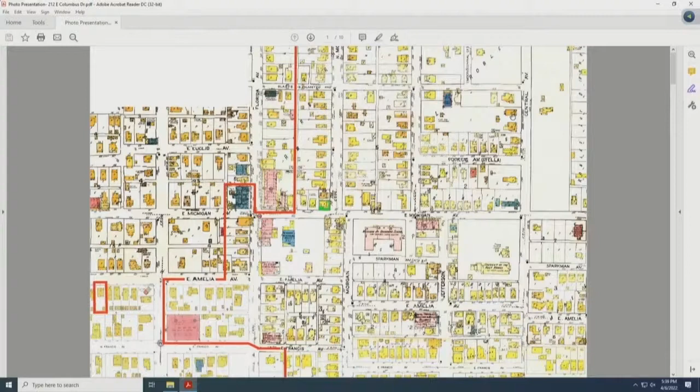You should see in front of you the 1920s Sanborn map with the subject property at the center of the slide, shown in green, at the corner of what was then Michigan Avenue, now Columbus Drive, and North Morgan Street. This property at that time did have a residence on it. You can see here that it's roughly at the center of the Tampa Heights Historic District, about halfway between the north and south ends. The property, again shown in green, at the corner of Columbus Drive and North Morgan Street. It's currently vacant.

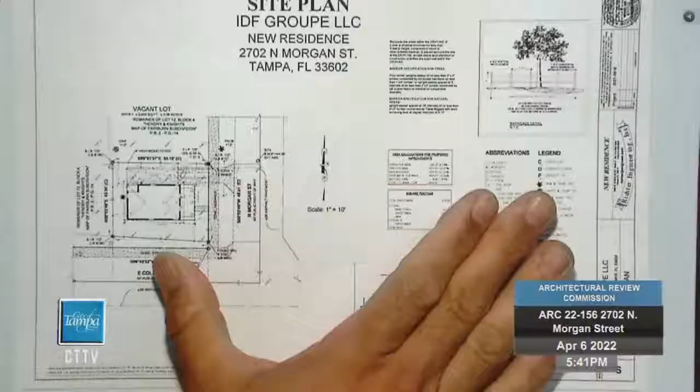Based on the staff report, which I received last Thursday, I was able to make all of the revisions that were requested as far as the conditions. I agreed to all of them and worked diligently to complete that for today to show you guys. So I'll go through some of those conditions, but I want to show you the site plan here.

As far as we know, from 1920, I believe there was another Sanborn from 1951 showing a structure, a single-family home in that position. So we decided to reposition to 2702 North Morgan, adding a home, a single-family residence detached, in that similar position.

I did try to upload that to Accela, but it was acting up today, possibly due to the recent update. I'm not sure, so I'll keep working on getting that updated to the record. Do you guys want to go through those items? Okay, I'll come back to that.

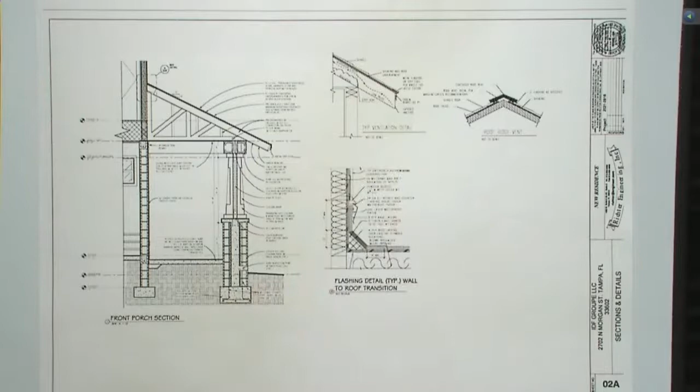This is the requested porch section, showing some typical details for the venting. This would be a ridge vent in this case, and we would do the exposed rafters with a beadboard soffit boarding underneath.

These are the wall sections that were requested, which will be uploaded to the record as well.

Now I'll go through quickly. As part of the conditions, doing the scale, we did the scales — there were different scales that you guys had requested. We have updated those on the site plan and the elevations. The approval is contingent on the special use application that's currently still pending, and I'll touch on that shortly.

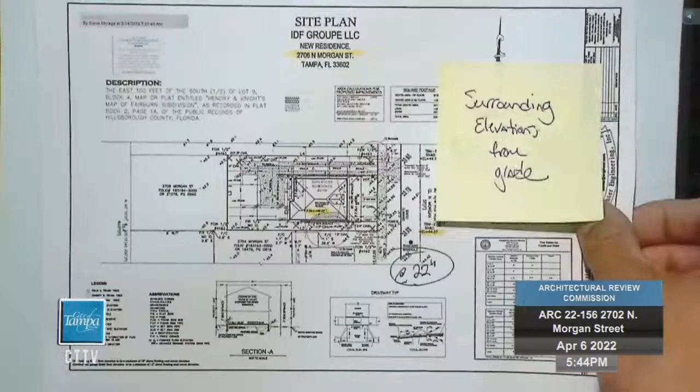We've provided the setback dimensions for the property. I didn't fully understand the format you guys potentially wanted there. I was fortunate enough to be the builder of 2706, the second property north of this site. Based on that site plan, we were 22 inches above grade. I measured the neighbor's house, who's at 24 inches above grade. This site plan is calling for 19 inches above grade, so within a few inches of what's being requested.

Let's go back to that — I don't know if I'll be able to do this correctly. As far as some of the setbacks, the house immediately to the north, 2704 North Morgan, has about a 3-foot setback to the stoop, or the steps, and 8 feet to the columns of the porch. The new construction home at 2706 has a 12-foot setback to the porch, and then 20 feet to the front door and the front elevation.

Again, some of the other items that were requested were to label the elevations and the cardinal directions. We've done that. We've removed the gutters as requested. We've provided the soffit detail in the plan. We've updated the windowsills to measure 2 inches on the plan as well, and removed the 4-inch trim below.

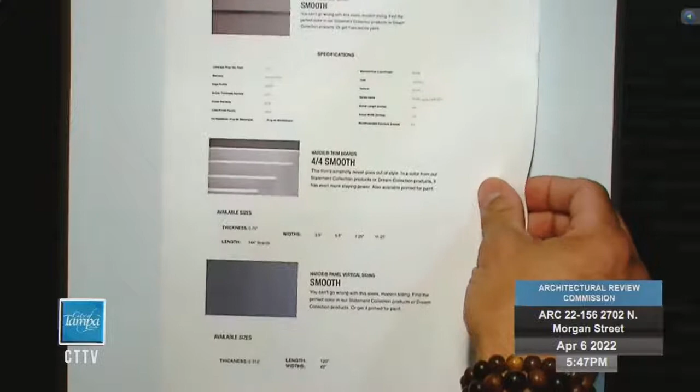The siding is a lap siding with a 6-inch reveal, so a 1x6, smooth finish, and then it'll be cement board, James Hardie brand, with the different trim pieces that they provide, various throughout the plan, so from 2 inches all the way up to 8 inches.

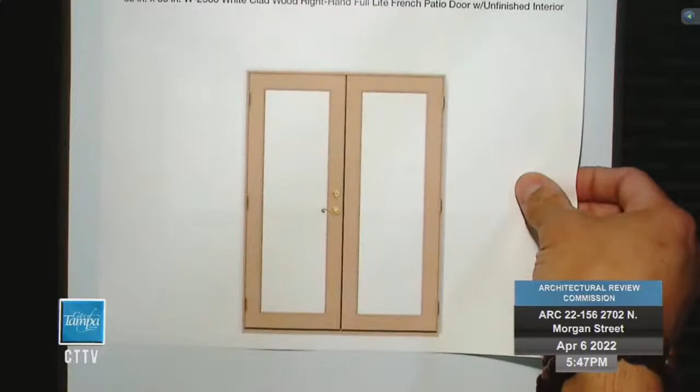Craftsman style door for the front. A full light double door for the rear porch. A 1/1 aluminum window, as requested.

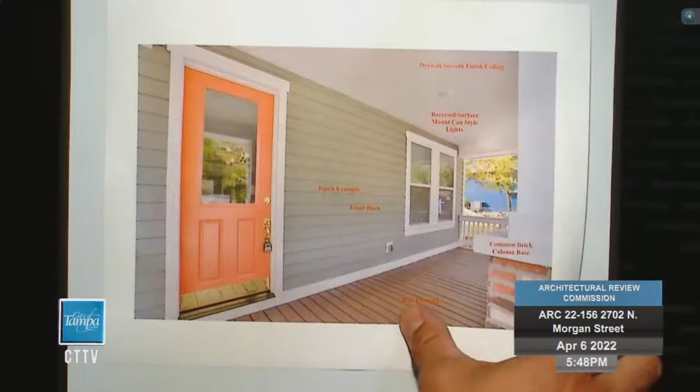The only other thing I wanted to point out was just kind of the application currently for the special use. I had requested to reestablish the lot as a single-family detached home to be addressed as 2702 North Morgan Street with a 16-foot front setback and an 8-foot rear setback. That would be consistent with the home at 2704 North Morgan and consistent with some of the Sanborn insurance maps that are available to us from the 1920s and the 1950s.

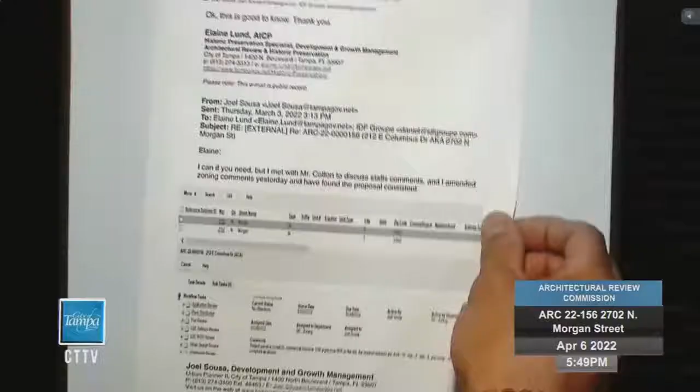As I mentioned, that was still pending. Right now it was showing pending the review of both the ARC, or the approval of the ARC, and also of zoning. The last communication that I have from zoning was with Joel from Thursday, March 3rd, which showed that he had discussed this with Mr. Cotton and found the proposal to be consistent.

Actually, take a minute and zoom in on the elevations, front. Absolutely. Sides and rear. Yep. And then put up your wall section after and walk through all the materials from the roof all the way down to the foundation. Sure. Sorry, it's my first time, so I've...

Can I ask before you go into that, do you have better renditions of this? These look very light, or is it just the focus on the? We can zoom in. It might be the focus a little bit, yeah. I mean, they are black and white, but they are. Yeah, that's a little better. Is that a little better? Thank you.

Do two at a time. Okay. Go through some of that. Describe what's going on from the start of the roof, and talk about your dormer, your roof, your overhangs, everything. Okay, let me go back to.

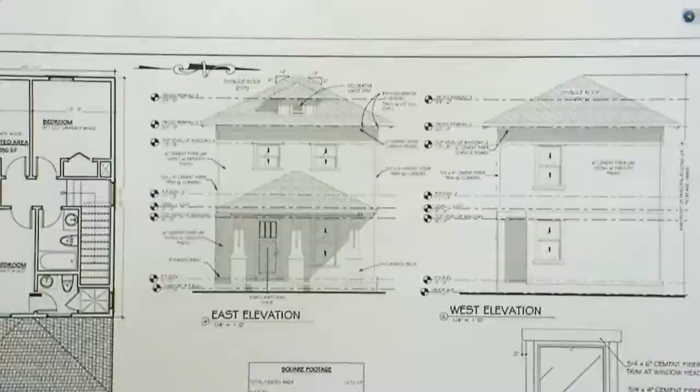So again, as presented, some of the items here, we've got the typical front porch. In this case, we did remove the railing, since we're just about 19 inches above grade there, so not required. We would be using a common brick around the stem wall, as well as the columns at the front. We did have some common brick on a column at the rear, which we have removed per the ARC's request. We've gone ahead and also added a window here per the ARC's request.

We'd be using an architectural dimensional shingle on the roof. As I mentioned prior, the siding would be a smooth plank 1x6 siding. We do have a 6-inch cornice board at the top. We would be doing 6 inches between the first and second elevation, and then we would do an 8-inch at the bottom above the stem wall.

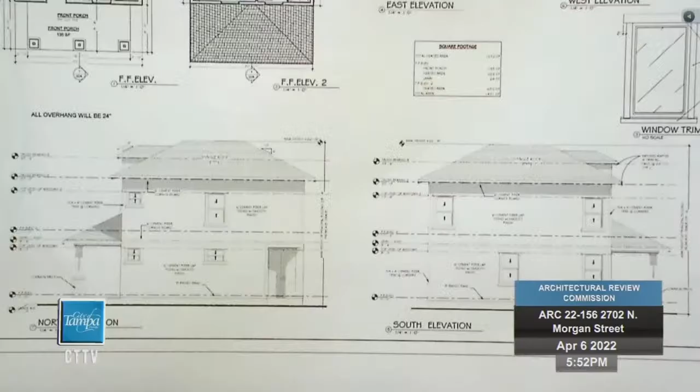Let me scoop this up so you can take a peek at this. So this is now showing both the north and south elevation. The south elevation would be parallel to Columbus, and the north elevation would obviously be neighboring the 2704 property.

A section of the front porch was requested and is being shown here, again highlighting the exposed rafter tails. We would be using beadboard soffit underneath, with common brick columns, and then wrapping the top portion of the column again with the cement board siding.

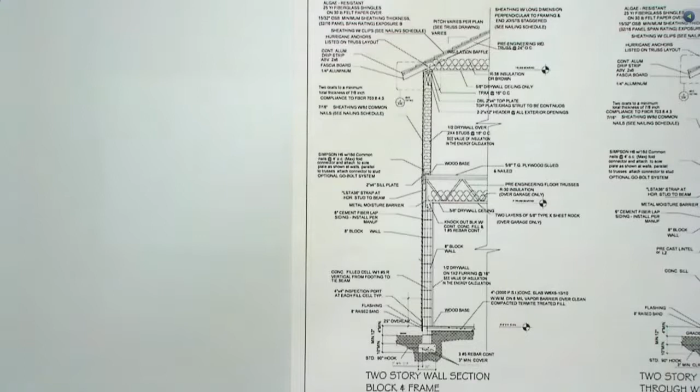And here's a wall section, as requested, again showing the different building materials along with the exterior siding, exposed rafter tails, the fascia board, and the stem wall.

One more time, I'll bring up the site plan here... which I lost. There we go.

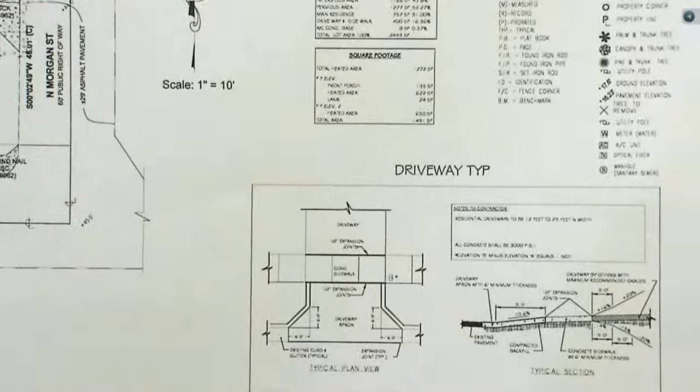We've also, as requested, marked the driveway and sidewalk scoring on the site plan.

So for now, that'll conclude my presentation. I appreciate your patience. More than happy to answer any questions later on.

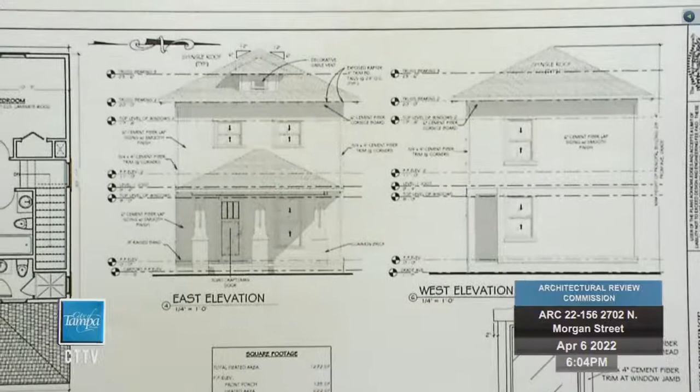What is the material that's going to be used for the front steps? That is going to be concrete as part of the stem wall. It could be wood if need be. That's what we actually did at 2706, but as of now, it would be concrete. What is the design of that going to be? I just don't see anything here to show us the width of the steps. Let me see if it's provided in the side section. I apologize, I do not have that section, but I could provide that later.

Now, I'd like to see a wall detail with the window section.

So my first question is on the eave. Can you clarify for us what that distance is going to be? That 24 dimension, inches - it is going to be 24. It just looks shorter there. These, I was not able to get to that, these are not to scale yet. It was requested, but we received these comments on Thursday, so I did the best I could for today, addressing I think 18 out of the 20 points.

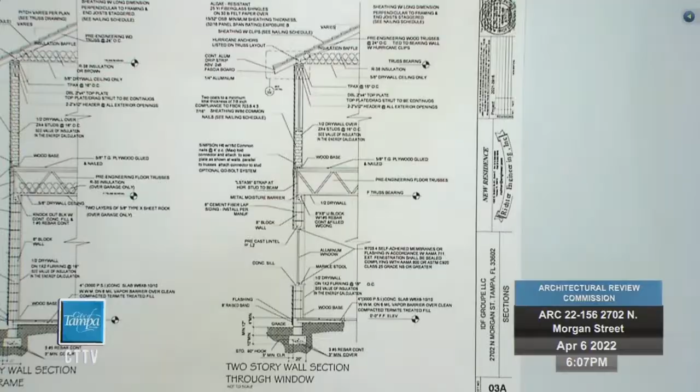So as it's shown here, the intent is masonry at the first level and wood frame at the second level, correct? Yes. Okay, thank you.

Let me grab that section. I've only got one other question, regarding the trim boards. I noticed on your material list it was showing a 4/4 board. Let me go back to that here. The reason I'm asking is, are you planning on using a 4/4 or a 5/4? So these are, zoom out here, this kind of shows what's available to us, starting with the lap siding, the trim boards, and then the vertical siding are just the larger sheet panels.

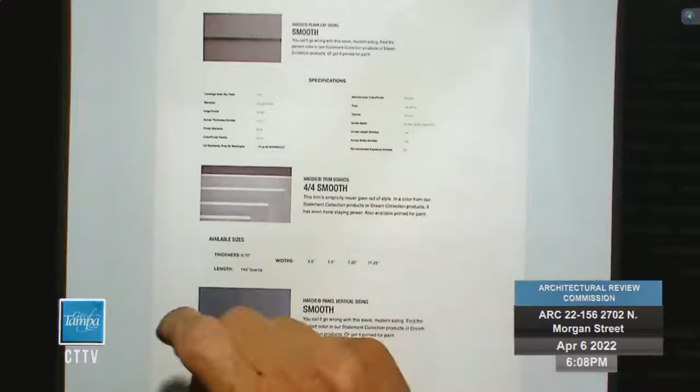So the dimensions are here in the sense that - where are we at? It actually is a little small, I apologize. Can you guys see that? So to clarify, your plan is to use the 4-quarter trim board that's actually 3/4 of an inch thick. Oh, correct. Yes. Sorry about that. Yeah, the true size would be 3.5, which is what's available.

I'm actually asking about the thickness of it. Oh, the thickness of it? They actually make a 5/4 that's 1 inch thick, which just gives a better shadow line around the windows. Okay. We would have to visit that and just see if it's available to us. I mean, the thickness here showing the 3/4, but if a 1 inch was available, we wouldn't object to that.

Commissioner Boyd? Can you please, on your site plan, show where you're proposing fencing? And do you have a design for the fence? I did not propose a fence on the site plan. I will bring it back up. And we do not have a proposal on a type of fence at this time.

So is on the north side of the property, is there that 4-foot-high wood fence existing? Yep, there's an existing fence on the north side, nothing on the south side or west side at the rear.

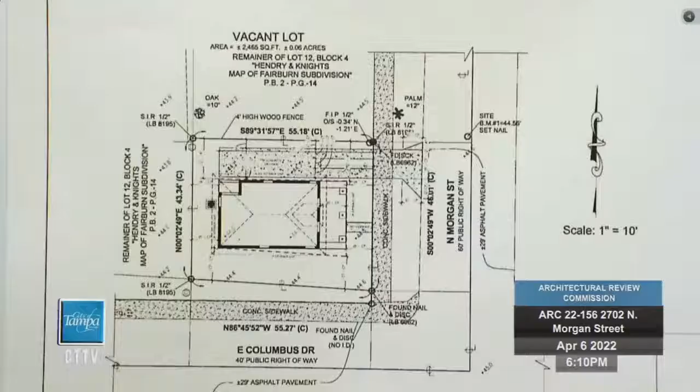Can you show us where your equipment would be located, your air conditioning and meters? Currently, right now, I would not be able to tell you the meter, but we are siting the AC unit right here at the rear of the property. And how do you plan to shield that from the street view? We could visit fencing, possibly fencing the entire property. It wasn't something that we had marked on the site plan, but we are more than happy to fence in the property and show an appropriate fence that's approved by the ARC.

And then on your front elevation, can you just confirm the material of the top portion of your columns? It would be the cement board, dressed in the cement board. So it's a 4x4 post dressed in the cement board. Okay, thank you.

Commissioner Myers? Is it appropriate now for me to ask what our responsibility is here? No, we just have to ask him that. Okay, just questions for him. I have no questions for the applicant, thank you.

Thank you. Can you go back to the porch column, the brick? You'd mentioned common brick. Do you have an image for what it would actually look like once it's in place? Yes, I do. It is a small cutout though, so I apologize, but let me find that here. So many little pages. There we go. Sorry about that.

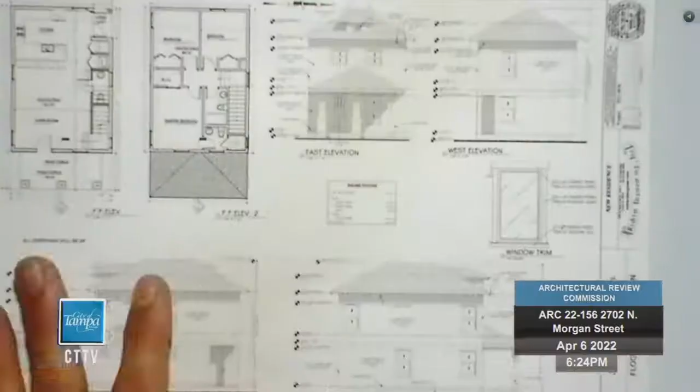It seems to me that having the hip roof, repeating the hip roof over the porch, makes it very tall, and then it makes the windows very short on the second floor. If that became a simple shed roof, which really fits with the framed vernacular that is the rest of the house, it allows an opportunity for those windows to drop the sill a little bit. And then in conjunction with that, the brick piers at the porch, while they might be found on a framed vernacular, frequently you would get just a regular column, whether a 4x4 or round column, and that returns a certain amount of space to the porch, which seems to me to be a good idea.

I don't have as much problem with the brick wrap on the columns. I agree with the roof type on the porch, especially if he reconsiders a corner condition, because it will afford something back to the owners with the second floor amenities. But the brick piers, the only thing I have concerns with is the brick itself. The massive mortar joints are just inconsistent with what we see historically in these districts, so I don't think that's appropriate. And there was something else we were looking at.

This is the 1920s Sanborn map showing the subject site in green on the south side of Idlewild Avenue, between Branch and Central Avenues. The red line shown on this map is the local historic district boundary. This is the map of the Seminole Heights Historic District, again with the local district shown in red and the National Historic District shown in blue, with the subject site in green toward the north end of the historic districts.

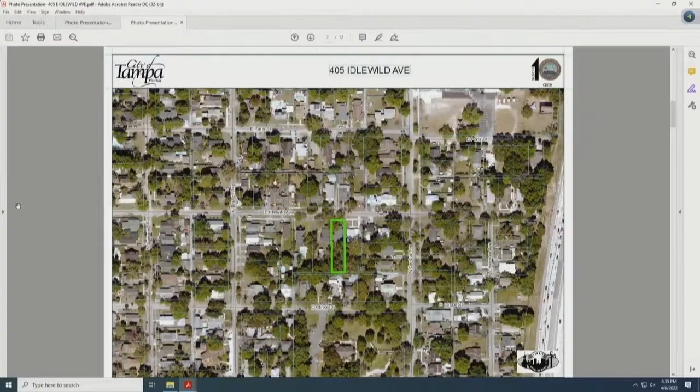And here we have the present-day aerial map with the site outlined in green, again on the south side of Idlewild Avenue. This is the front, or north side, of the subject site. This is the east side. This is the west side of the property. And this is looking at the rear of the subject house.

This is the property just to the east, 407 Idlewild. And this is the house to the west at 403 Idlewild. Now we're looking directly across the street to the property on the north side of the street. Here we have a view looking east towards Central Avenue, and finally a view looking west towards Branch. That concludes the photo presentation.

So at this time, I'll ask the applicant to present the request. This is Kamaria Pettis-Mackle from the City Attorney's Office — they're presenting the variance first, correct? Yes, correct. My name is Alan Dobbs, 5502 North Cherokee Avenue.

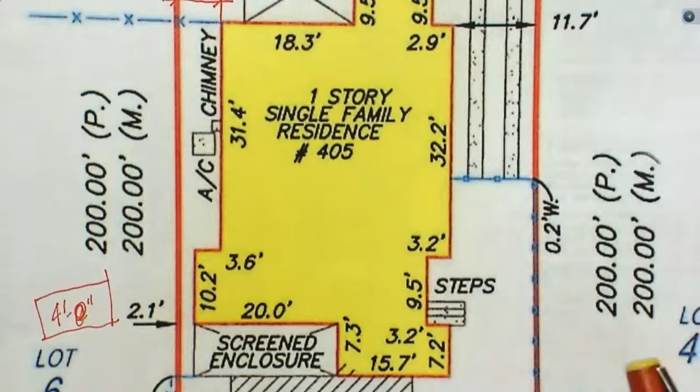So if we look at the survey in a little more detail, this is 6 feet up here, and this is where the bump out is, and we're actually going to kind of keep something similar to the bump out, but we're basically going to double what the existing setback is. So that's why we're asking for a reduction from 7 feet to 4 feet. And then further back, where we're going to add the porch, it's going to be 6 feet.

So this site plan shows it a little bit better. Again, we have 6 feet here. And then we're a little over 4 feet here, actually 4 foot 2 1/4. And then 6 feet 2 1/4 for the rear porch. So basically the rear porch aligns here.

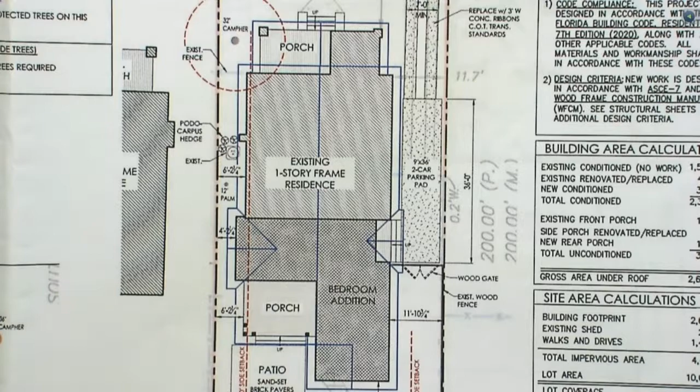We're keeping this bump out, but we're doing a side facing gable, which is typically more in keeping with the patterns of the neighborhood. The existing bump out, you can see, is a shed with the reduced roof height. And then over on the other side, forgot to mention, this sort of steps in, and that's why we're doing the side entry here with this.

And I know that's in part of the variance, but I felt it important to kind of understand the scope of the project. So I think I need to maybe show the floor plan a little bit too, to help justify why there's not really an easy alternative to getting a variance. So I think you can see it's slightly shaded. Let me see if I can maybe zoom in a little bit.

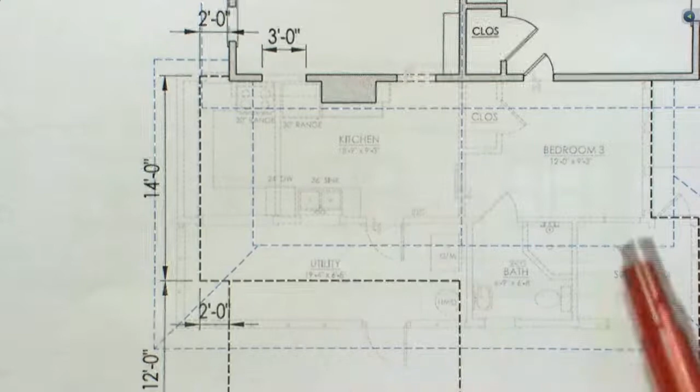So right now there's this utility porch, I'm calling it, off the back, and then the kitchen is right here, and it kind of bumps out to the side. And there's only one door right now. And then this is kind of an odd bedroom. There's been multiple additions — I think this was the first addition, and then this was added, and then this was added. You'll see in the certificate of appropriateness part of this presentation how that kind of looks.

But anyway, so to add onto this house, we're fortunate that we have a very deep lot, so we didn't need to go up on this house. We could go back. But since we're 6 feet from the property line here, we wanted to maintain that setback for the addition, not go any closer, but not increase it either.

But then you can see the kitchen. It's a fairly modest kitchen, but it's much more of a functional layout that has sort of a small eat-in area in the center, and then you have the main appliances there. So that's why we're still bumping out, but we're only bumping out a couple feet. So that kind of gives you an idea of the reasons for the variance.

I can go through the 6 hardship criteria, and then we can have some discussion if y'all have any questions relating to this variance.

So the first one is that the alleged hardships or practical difficulties are unique and singular. Well, as I mentioned before, what's unique about this house is its location on the property, being closer to the west property line than any other properties. We have the driveway on the other side, so that kind of restricts us from adding on to that side. The second hardship criteria relates to the difficulty not being the result of actions of the applicant.

Well, obviously that's not the case because this is an existing condition. The variance, if granted, will not substantially interfere with the health, safety, and welfare of others whose property would be affected by the allowance of this variance. Well, the property owner to the west is most directly affected by this. They are fine with it, obviously, otherwise they would have sent in a letter or be here to oppose it.

And also, what we're proposing is less than what it is currently. The fourth criterion is that it's in harmony and serves the general intent and purpose of this chapter, which is chapter 27 in the Tampa Comprehensive Plan. Basically, as I mentioned, it allows an existing single-family residence to be modified for reasonable use within unique design constraints.

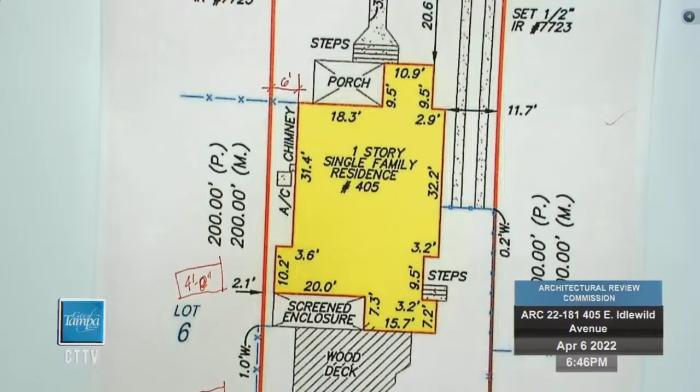So basically, the survey that I have -- I didn't have a CAD file, but I brought it into AutoCAD and scaled it. So the existing house is actually 6 foot 2 1/4 inches to the property line, and that's on your site plans, that dimension. So the porch, that's what we're basically vesting as an existing condition. The porch portion, according to the survey, is 2.1 feet, and we're reducing that -- we're increasing that to 4 feet 2 1/4 inches, which is basically bumping out 2 feet from the house, and that's what that works out to be. And then the porch on the back is all open, by the way, except for the columns, which I'll address later. It's not a screen porch, it's going to be an open porch, so it reduces the impact on the neighbor. So that one's 6 foot 2 1/4 to that, just like the structure on the front side.

So in the existing, if I'm reading this right, the existing residence goes 4 feet into this 6 foot 2 1/4 side yard over a distance of 10 feet, right? So it's like 40 square feet. Okay, and you're reducing that from 40 square feet to -- so the area would be 2 feet by 14 feet, 28 square feet. Okay, so you're reducing it from 40 to 28 square feet.

Yes. The other thing I forgot to mention too is there's a provision in Chapter 27 -- it used to be called an administrative variance, but now it's called a design exception -- that allows you to reduce setbacks, I think up to 10% administratively. You still have to do the public notice and everything. So I just want to point out that most of this is within the 6 feet; it's just that small portion for the kitchen where we're bumping out. All right, thank you, I have no further questions. I have no questions.

I have a question for staff, probably legal. Even though the variance request is written where a portion of it is breaking out 7 feet to 6 feet, and another portion 7 feet to 4, by granting 4 feet even for that small bump out, does it not indeed grant 4 feet for the entire property along that side?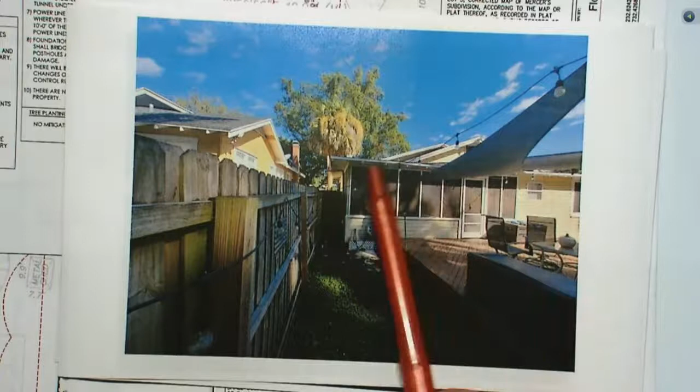And you can begin to see some of the multiple roof lines here on the back, but all of this, and even this gable right here, that's all part of what's going to be removed and replaced.

This gives you a little better view. It gets really interesting when this sort of turns the corner, which you'll see in the other pictures. And obviously that wood deck here would go away.

So you'll see on the site plan that the driveway is going to come all the way back to basically where the building bumps out right here.

This area here has vertical beadboard, so we're going to either keep it or recreate that detail and put a side entry door in the middle. But you can begin to see some of the odd things with the roof. This actually is at a 45 and slopes up.

And then that same area looking back the other way, that's a little door that goes to a little back porch area. You get a little closer up view of the siding, vertical siding there.

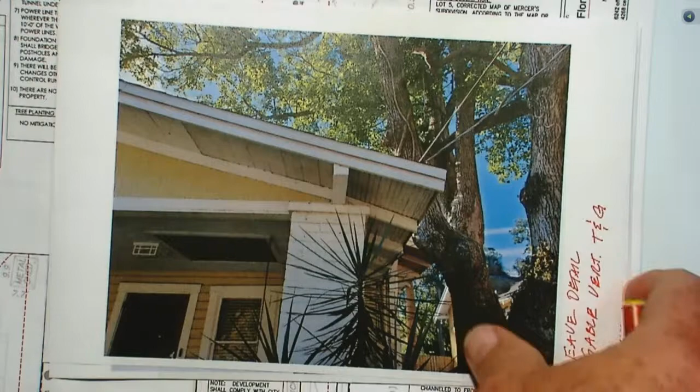This picture is just kind of to show the front and some of the eave details in a little more detail. Most of the original soffit material is beadboard, but there's a few areas where it's been replaced with 1x6, but everything that we do is going to be beadboard to match the existing.

And we have a few brackets on the house. These brackets are actually very simple knee braces, and you can kind of see the rafter tails and the eave detail. The front porch, the left side of the front porch is enclosed, but you can see it has a similar siding and window details.

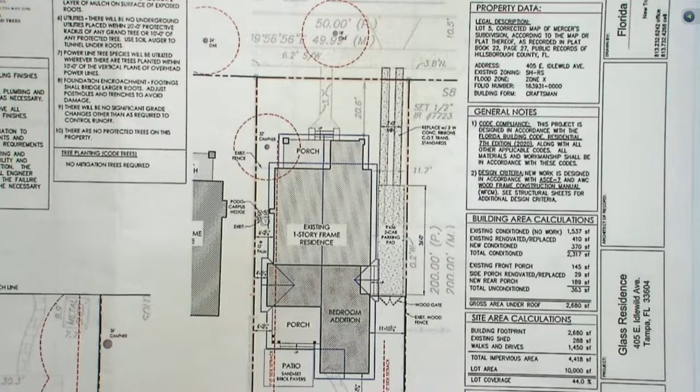Over on this side is where the existing air conditioning unit is. With the staff comments, I added - my clients don't really have a fence, and they aren't really intending on doing a fence on this side, so it's just podocarpus hedge screening the air conditioning unit.

Here you can see where we bump out, and we have a side-facing gable. We bump out over on this side as well with the side-facing gable, which actually is supported by brackets, which you'll see on the elevations.

And then this is the porch, and then they're probably going to do some sort of patio with a fire pit or something here. There's an existing shed that was done by a company called Historic Shed that is very nicely done. He actually uses that as his office.

And the site goes way back. One of the comments from land development was we need to show the whole site, but I couldn't show the whole site. So there's just nothing back there except a concrete pad.

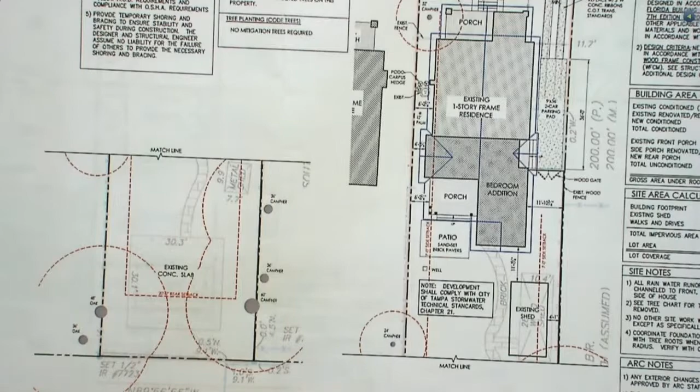Okay, so I already talked a little bit about the existing plan, but to show the new plan, again, I think the plan sort of helps inform us as far as window locations and spacing and rhythm and things like that, and also areas where we're bumping out, reasons for that. So obviously we already talked about that with the kitchen.

What we struggled with most was the placement of these 2 windows. Obviously we didn't want to have any windows, and we didn't want to have one small window in the center because that doesn't look good from a design standpoint. Also, it didn't work functionally for the kitchen. So the only option was to have these two small ones on either side of the range, and you'll see those in the elevation.

But that's not uncommon in Seminole Heights and some of the historic districts to have that asymmetry. It's way back away from the public realm, so it's more of a form giving way to function there.

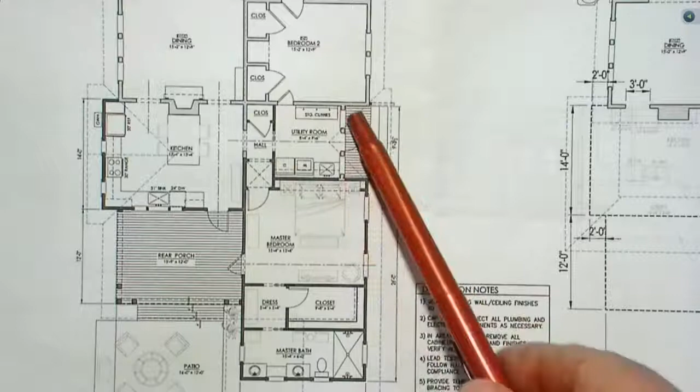Over on the side here, you can see we have some full width steps that go up to a recessed entry, and then you go in, so that is ideal for a laundry, utility room, mud room. And then from there you go into the house, and this is where we're adding on a master suite with the standard walk-in closet and master bath.

The way these were laid out sort of dictated how the windows are laid out in the elevations. The porch was fairly wide, or actually wide and deep, so rather than doing one large column on the corner, we decided to do two smaller columns. Those are just simple box columns with some detail at the top and the bottom.

So on the elevations, on the front, there's really not much change other than these areas, but here it's the roof and this wall. On this side it's just the bracket and this roof, but they're way back. I tried screening it, but it doesn't look like it's that screened.

So this is the driveway side of the house. I like to call it the public side of the house. You sort of have your public side where you have the driveway and kitchen usually, but this house is opposite, which is a little bit unusual. That also was a little tricky working off the floor plan when you enter one side from the driveway, but your kitchen's on the other side.

But basically all of this inappropriate, multiple additions come off the back. And right here, this shows the addition sort of dashed in.

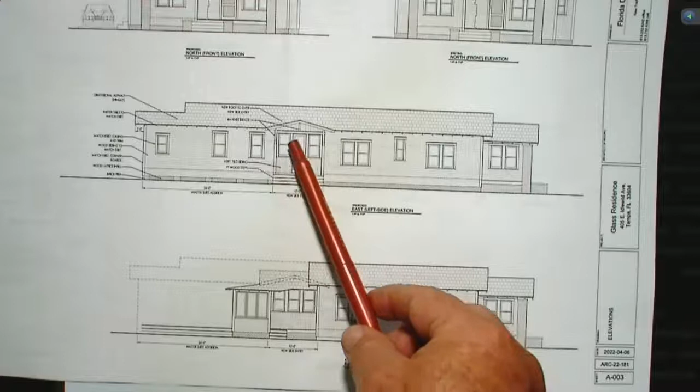So there we have the vertical bead board, we have the single 1/1 windows, and then we have a bracketed gable roof. The gable end will have that vertical bead board to match the front gable. And on the foundation, we're going to express the piers and then have the foundation screen.

I don't have details of the foundation screen enclosure. Hopefully we can work that out with staff. This house is like a lot in Seminole Heights, we don't have much clearance here, so it's always a little tricky if you try to do a framed lattice enclosure. You have to use a fairly thin frame.

For the rear, this was a really hard elevation to draw, because there's so many roofs going on, but the dashed lines sort of show where the addition is going. So on the rear, we have the porch here, and we have an exposed beam with a drip cap that matches the drip cap on the windows.

We have these 8x8 square columns. They're actually a kiln-dried, pressure-treated manufactured column, and they're great. I use them on a lot of projects in Seminole Heights. And then you can kind of see the bump out there.

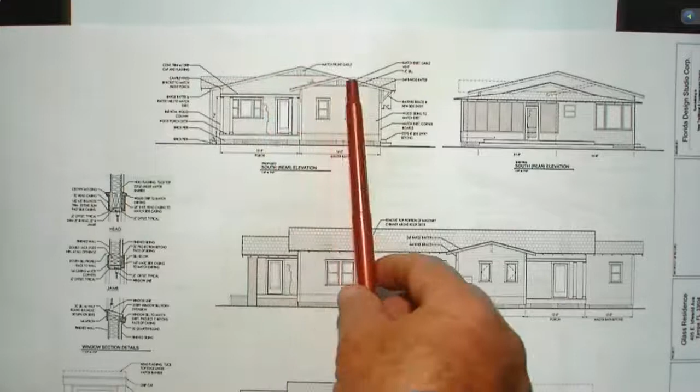All the siding matches the existing, the little gable end detail we're going to match. We put brackets here on the corners to pick up on the front of the house, but they don't have any other brackets higher up on the gable.

And then the other elevation, this is the side where we've got the variance. So the fireplace, we're just removing the top part of it, but it will still remain. Basically nothing from here forward. This little drop down area and all this is going to be removed, and you can kind of see the new outline there.

So these are the windows that I was talking about. They're sort of off-center. I had indicated on the plan the gas water heater. I didn't show it on the elevation, so if anything, it helps maybe balance that a little bit. But these will just be small casement windows.

And then, again, the porch pretty much is the same on the side as it is from the rear. And then the master bedroom, that's the small window in the bathroom. I didn't mention the corner boards - we're going to match the corner boards. And as I mentioned before, all the roof eave details match the existing.

As far as the typical wall section, just kind of working down, we're going to have asphalt dimensional shingles on the roof.

We're gonna have the beadboard finished soffit, as I mentioned before. We'll pay careful attention to the drip to make sure that soffit board extends past the end of the rafter tail so it doesn't rot out.

And then we have the siding to match existing, and the window details are on the previous page. But we're just doing 2x4 frame construction on a suspended wood floor with spray foam insulation. That works really good on these bungalows using a closed cell foam, because we have wood floors with the high moisture below and the dry cold air above. The wood floors tend to cup, so you need a good moisture barrier. So the closed cell spray foam is great for that.

And then we just have the masonry pier with the thin brick veneer. I don't have a sample with me, but we'll be matching the existing. The piers are actually painted, so they aren't any kind of natural red brick. A lot of houses in Seminole Heights didn't use red brick. They used this yellow brick, which is a very soft brick, and usually it was painted or stuccoed over after it started eroding away through the years.

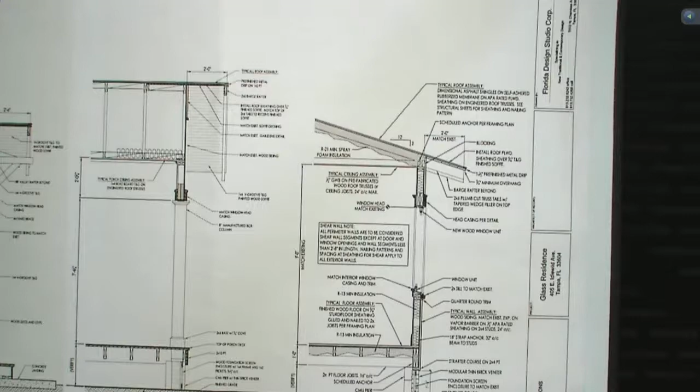The section through the rear porch, the gable kind of matches the typical gable end on the front of the house. We have that vertical beadboard there, and then we have a little sill that matches the window sill as a termination or transition to the regular wood siding that comes down, and then the beam is sort of trimmed out like a window head casing.

And then the porch has, we're just going to use 5/4 by 6 boards. We aren't going to use the 3/4 tongue and groove. This is a south and west facing porch, so the sun would make it a maintenance nightmare. This is on the back of the house, not within the public realm, so we feel it's appropriate. And then we'll have the 2x10 band that runs around, and of course we'll have the brick clad piers.

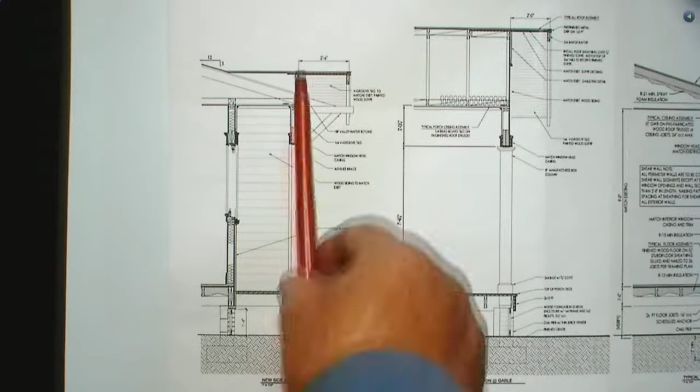And then this is the other drawing that I did not have on my final exhibits when I submitted them previously, is the section through that side entry. So this is the main outside wall of the house, and then we step back. So it's sort of an existing 2x4 frame wall.

But then this part down here is gonna have the vertical 1x4 beadboard, tongue and groove. Typical siding to match the rest of the house. This has the bracket or knee brace, you see a little bit here. That's actually the rafter beyond, because there's actually a hip rafter at 45 where it transitions from this roof to the eave beyond. One of the things to note here is it's 2'4" and 2 feet as opposed to 2 feet, and I can go back to the roof plan and show you why.

And then again, wood steps, which will match the back porch.

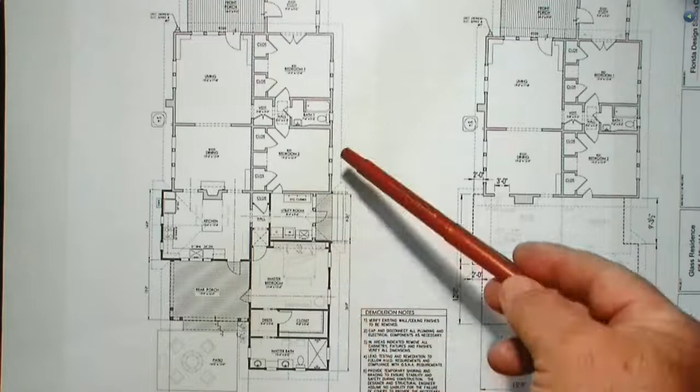So a lot of times, and you see this a lot in Seminole Heights, Hyde Park, Tampa Heights, you have a 2-foot overhang, and then suddenly you have a side-facing gable. That gable has a 2-foot overhang, and you have a 2-foot overhang on the eave, and it creates an odd transition from the barge rafter or fly rafter down to the eaves, especially if you have exposed rafter tails. So I found just by bumping out 4 or 6 inches to do a barge rafter here creates a real nice, simple roof transition. And roofers like that because it makes doing the drip a little simpler.

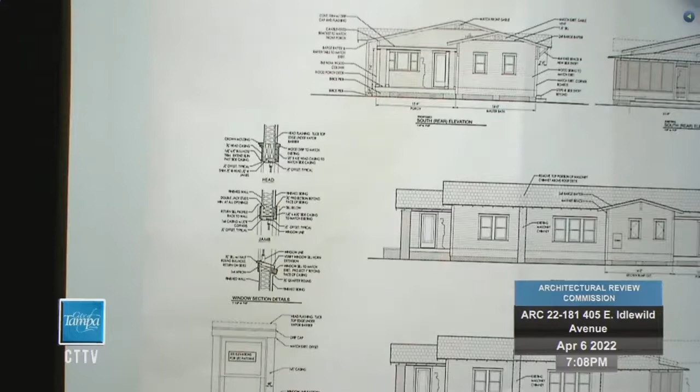The window details are pretty typical. It's the same ones, y'all seen them before. It's because I do a lot of stuff in Seminole Heights, and all the windows are basically the same. But the important thing is what Delacosta used to call profile panning. It's getting the correct profile on a window as far as how far the trim sticks out and how far the glass steps back in that whole profile. So it's like you take a window, turn it on its side, and it's like a pan, so it's a profile of that pan.

So it's important on the window detail. We have the drip cap, the head casing, the side casing to match the existing, and then we have the larger sill with no skirt, just usually like a 3/4 inch trim below it, and then that's what it looks like in elevation.

I didn't bring a whole window sample, but the windows we're proposing are Sierra Pacific windows. Those are nice because it's the H3 series. I know this is a contributing structure, but it's very difficult, if not impossible, to find wood windows for these houses that meet all the codes as far as impact and wind loading. So considering this is all in the back of the house, this window is used a lot in the historic districts, and a lot of that's because of some of the details.

So on the sash here, it has basically a putty glaze profile, and then it has a typical nice size sash, and then the rest of these are just added trim pieces, but we would use wood instead, similar to the details I have in the drawings.

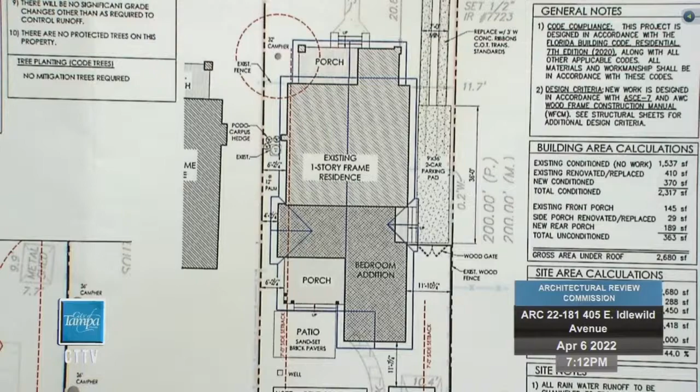Thank you. We'll go on to the staff report now. Thank you, Elaine Lund, Historic Preservation Staff. Staff finds that this application is consistent with the Seminole Heights Design Guidelines, and as the applicant addressed all the conditions that were listed, I have no further comments at this time, so I'm available for your questions.

Thank you, Ms. Lund. If there's anyone here who would like to enter into the record public comment, please come forward at this time. Seeing no one, we'll go ahead and move on, and commissioners will begin asking questions. Anyone? I have none right now.

Can you confirm the windows on the east wall - does the sill height match one of the existing windows? Oh, okay. Are you talking about these windows? To the left, over here, in between those? Yep, I see what you're saying - these windows and these windows. Oh, that's a really good point.

Yeah, these windows - I'm not sure why that's off. I remember this window being higher than this when I was doing the as-built drawings, and I think I was matching these windows to this window. We would certainly be open to the condition that we have the window head height and sills aligned with the existing windows. I'm going to try and find a picture of that wall too, if I can.

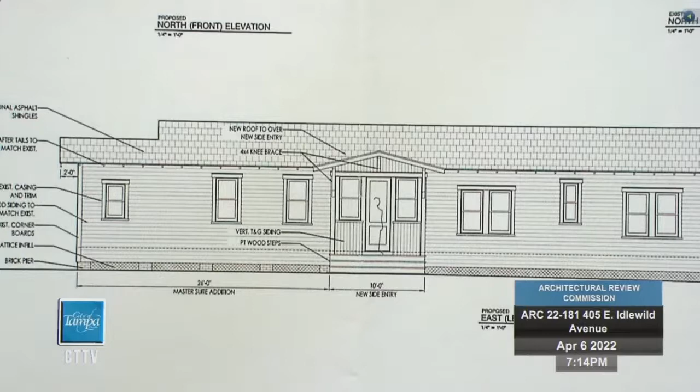No, you're right, you're off. Yeah, this picture, you see the existing windows.

Can you throw up the floor plan of the master bedroom? I want to see what the rooms are that correspond to the existing floor plan. So the paired windows are bedrooms and the single is a utilitarian functional space.

These windows are 30-inch windows. Most of the windows in the neighborhood are either 30 or 32. As you all know, we have to meet egress, although technically we don't because we have a door there, but typically we do larger windows in bedrooms.

I think it would also help, as part of the Secretary of Interior standards, to differentiate new from existing. So if there is a little bit of difference, maybe that's not that big of a deal. But again, we'll be open to any condition that y'all feel is necessary.

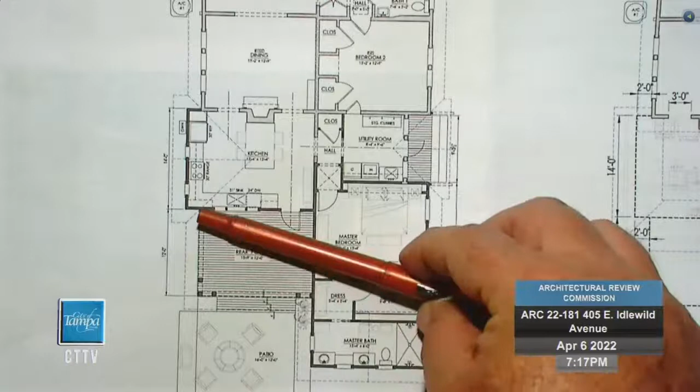So the upper left side, right here. This span was 15'9", almost 16 feet, and this was 12 feet. So the reason I added these columns was to reduce the span and also give a little more of a formal presence to the rear. That's why I did not have one there, but I do have a pilaster there. It's one of those design things. I think it's fine without it, but we could also put one in if the board feels necessary.

You have a good explanation in that the dimension is less, therefore you're trying to reduce the span.

I also wanted to ask about the fireplace that you seem to be reinstating. Yeah, I'm glad you pointed that out, this is kind of exciting. It appears the original fireplace is here, it was just covered up. And there's a door here, but it does not appear there was an original door here.

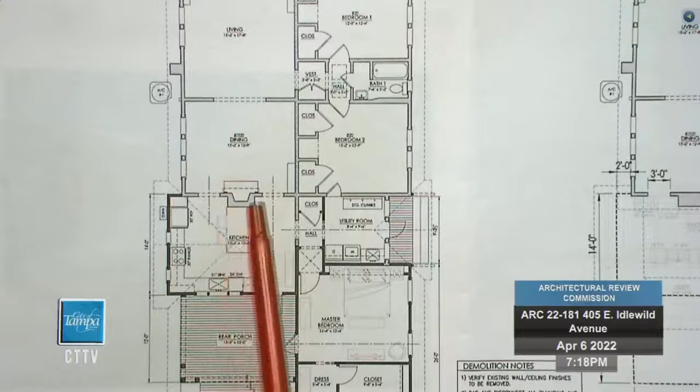A lot of clients I've worked with will just take the fireplace out, and I try to talk them out of it. But my clients want to keep the fireplace, whether it's operable or not is a whole other question. Opening it up and having the natural brick on the back side is such a great opportunity to showcase some of the original fabric of the house. And the best thing is it creates a very functional kitchen dining area as well.

Does the chimney go through the house from that fireplace? That's a good question, no it doesn't. I talked to my client, and the last time they had the roof done, they cut it off right below the roof deck. So it's not a functioning fireplace right now.

Okay. I have no questions. Anyone else? No? You have 5 minutes for rebuttal.

My client just told me it wasn't them that cut the chimney off, the previous clients did. So okay, all right, I'm done, thank you. Thank you, we'll go ahead and close the public hearing and discuss the case.

I have a couple of notes: to add scoring at the drive and parking pad, to finalize the foundation screen enclosure with staff, work out hardware and lighting. We've got a fence and gate that's still in question, and then just to update those windows, but I don't have any other glaring concerns.

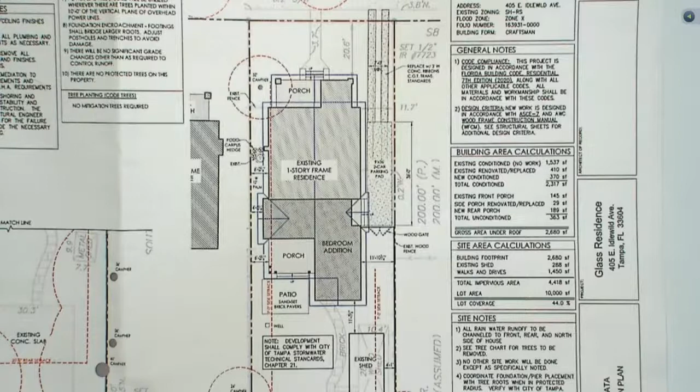So the chimney that remains is just in front of the AC unit and the screening, so you do see it from the street, and you can see it in the staff report imagery. And they were typically a defining part of the type structure, you know. Right. I understand that it's easier to roof something when there's nothing in the way, but unless it's failing and it's a danger to the public or the occupants, I just can't agree to that.

Any other? I think that's easily added as a condition. Can we add that as a condition? Yeah, we can, if everyone agrees. What elevation is that? West, yeah. Okay, do we have any other? I had no other points that I recall.

I move to grant a certificate of appropriateness for the drawings and documents presented at this public hearing in ARC 22-181 for the property located at 405 East Idlewild Avenue with the following conditions: that scoring at the drive and parking pad are added, the foundation screen enclosure design is approved by staff, lighting and hardware is approved by staff, all fence and gate designs and locations are approved by staff, that the window head and sill heights on the east elevation are updated to match an existing window, and that the existing chimney on the west elevation is maintained. Because based upon the finding of fact, the proposed project is consistent with the Seminole Heights design guidelines for the following reasons: that the scale, massing, alignment, and the quality of the district is maintained.

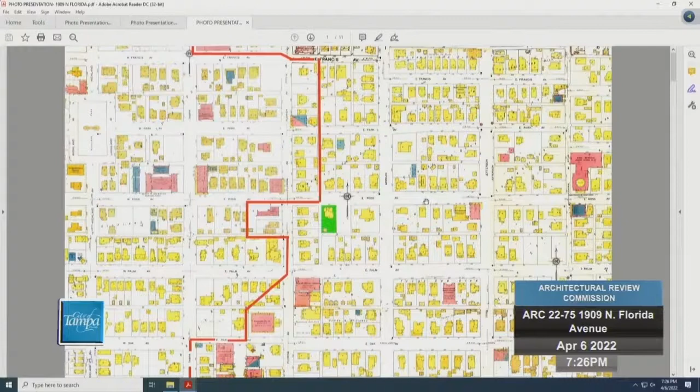This is the south end of the Tampa Heights Historic District map with the parcel shown in green. The red line is showing the local historic district boundary, and the blue line is showing the national historic district boundary. And this is the present-day aerial of the subject site, outlined in green again. Again, you can see it's about one parcel in from Florida Avenue to the west, and it's currently vacant.

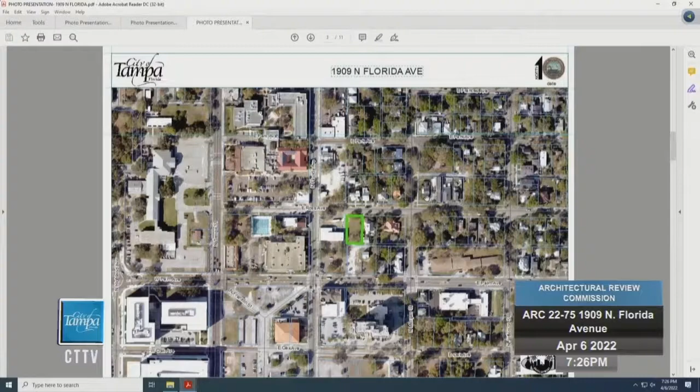This is looking south into the subject site from Ross. This is a vacated alley that is part of the subject site. To the east, this is a non-historic new construction located in the historic district on Ross. And to the west, this is the property that is facing Florida Avenue. This is the historic structure that is across the street directly to the north on Ross, and the property adjacent to it also across the street to the north. This view is looking east along Ross, and this view is looking west on Ross toward Florida Avenue.

And that concludes the photo presentation. So at this time, I'll have the applicant come forward to present the application.

Good evening. As you know, this was a continuance from two months ago. I believe all four of you were here previously, so I won't get into too much prior detail, other than that we did make some significant changes, which I think will make everyone happier about the scale of the project.

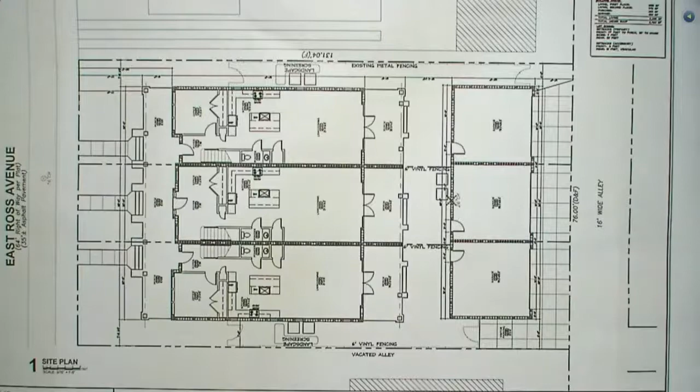Just a quick review. Basic site plan hasn't really changed. North is this way with Ross Avenue, still doing 3 units. One of the biggest changes we talked about was changing the undulation of the porch to more directly match what's going on the second floor, which that shows. We added some more screening, of course, as directed.

I'll just go through these quickly because we want to get to the elevations. First floor again, second floor, which has remained the same. And then we'd have changed the roof orientation and design quite significantly. So we'll start there.

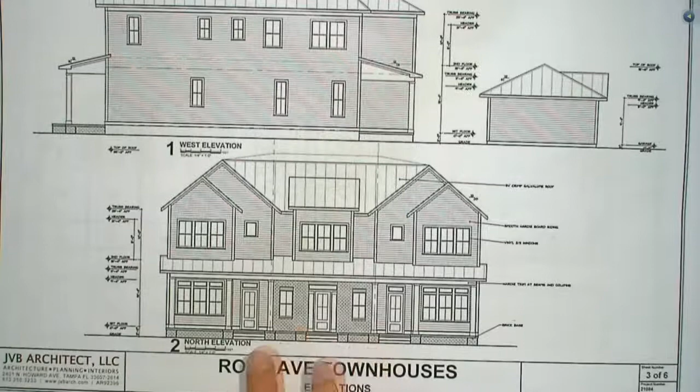Previously, we had a large gable that ran front to back over the property. We've since decided to do a modified hip design for the main structure with these gables and the shed roof facing the front to give us delineation and detail of the roof forms.

We've simplified the front porch dramatically, reduced the amount of columns, made them fatter and larger, and spaced them further apart. We used to have doubles, little thin columns, which I think has really cleaned up this facade.

And then on the rear, what we have are these two bump outs that are overhanging the rear porch area. We've reduced their impact by lowering the pitch, but everything is essentially hip roofs on all sides except for the front.

And the front, those two double gables, are the most prominent feature of the front. We used to have little gables here and here and here. We've gotten rid of that. What we're really trying to do here is create a single expression. Even though it's a 3-unit townhouse, we really wanted to give it that single family appeal in its scale and massing and its approach to the design.

Just to quickly review, we also had gable ends on the accessory structure. We have changed that to hips with only two small gables facing south into the alley, which I think simplifies the design, cleans the design up. And then you can again see those same ends of the accessory structure on the other elevations.

Same details as previously on all the fenestration. That is really not changed. But what we have done is, again, the front porch we've simplified without the gables. We've also brought what was on the second floor down to the first floor, so that expression of the massing is expressed on the first floor.

All of these are kind of typical details, using a 2x6 wall or 8-inch masonry and recessing all of the windows so that it has a more historic character. These are all pretty typical. We looked at those last time.

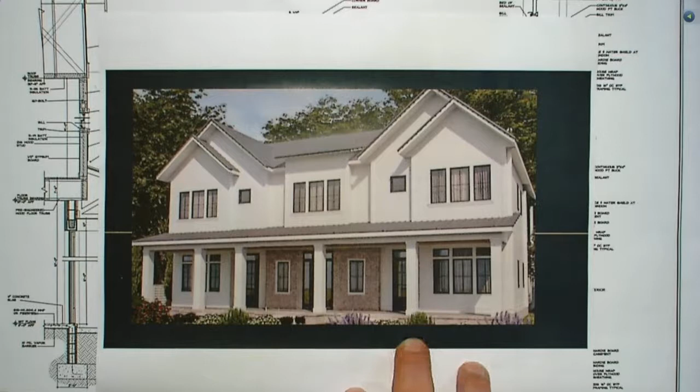This is a general rendering. Not everything is perfect here, but it's pretty close. The roof would be a 5V crimp, Galvalume. This shows it slightly darker than it would probably really be.

The one unique feature we've toyed with is we do have a brick base around the entire porch, and we are looking at doing a brick centerpiece here. I know we can talk about that. We were trying to break up the scale and create a single family house appeal.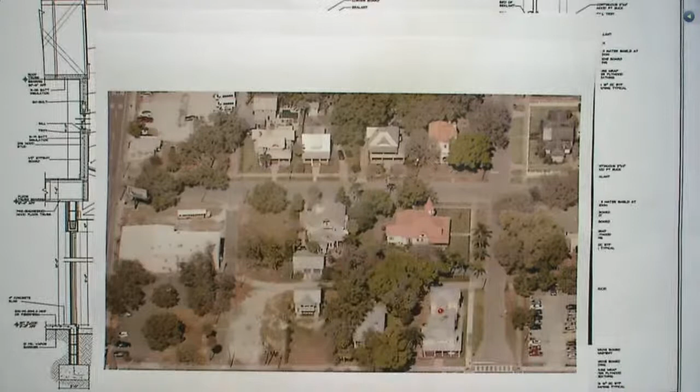Going through, this is an aerial of our block and the block to the north. You can see we have significant houses all within our block here. This house and this house have actually very similar roof forms in the way of a combination of hips and gables with really a small mansard at the top. And then this is a more flat view of that.

Same here. This is our structure, approximate size and location of it with its accessory structure, and then the other surrounding roofs and scale and massing of those houses.

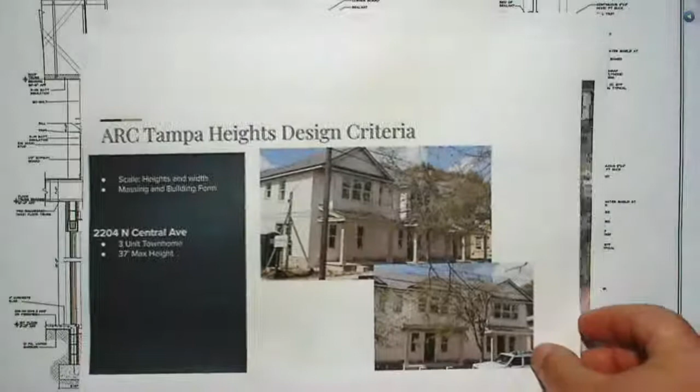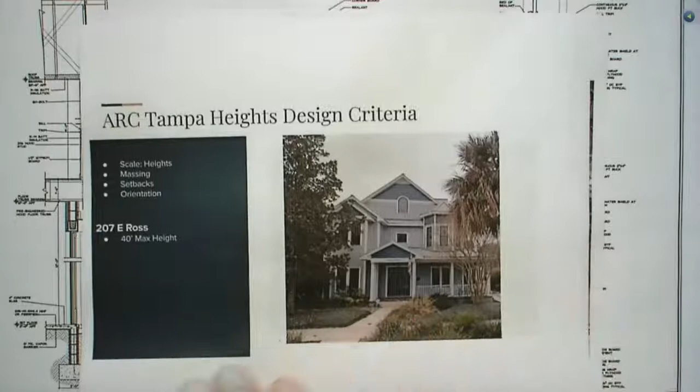Some other similar houses and properties. That one is next to Lee's Grocery—it's an existing duplex. This is one under construction, which is a triplex. This is one of the houses I just showed you on the aerial, similar in massing with hips and gables. This was approved by this board about a year ago, a much bigger project, about two blocks south. Another townhouse, a 9-unit, approved by this board a little east of that. The house next door, which we've looked at previously, and this is a large accessory structure about a half a block to the east.

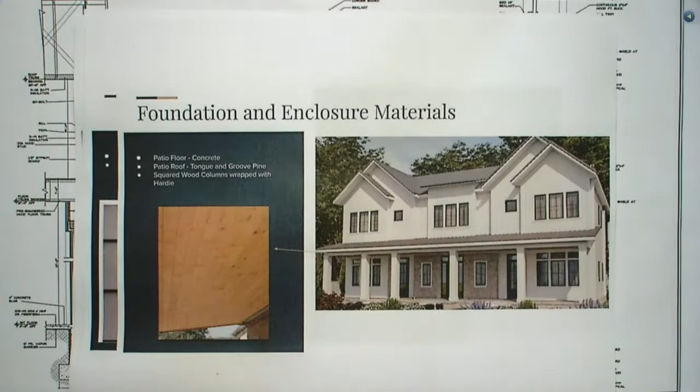Again, a 5V crimp metal roof would be the material. We'd have bead-boarded, non-vented soffits and fascias, all Hardie board essentially—smooth Hardie board, and kind of a lighter red brick. Patio floor would be concrete, patio roof would be T&G, stain. Large 2/2 windows with similar 2/2 doors and side lights—that's all represented in the elevations. Garage door with some carriage house added pieces. Again, this faces the alley. Sconces and hardware, all either black or oil rubbed bronze.

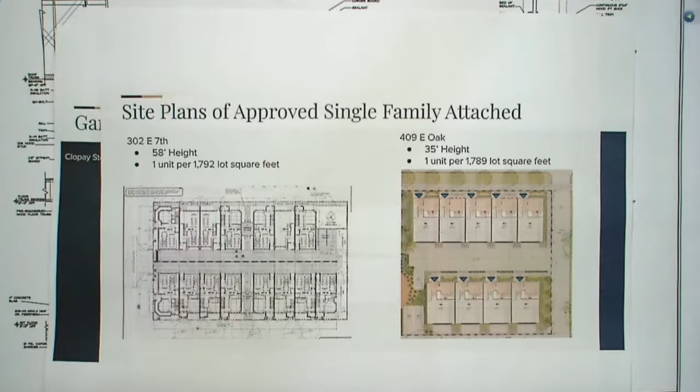Again, two other projects of even much higher density than we're proposing, a block or two south. The specific window we're proposing is a double hung vinyl window sash, very similar to a traditional window. The only difference is it's not as deep a pocket, that's why we recessed it two inches. But this is—let's see—the brand is Sierra Pacific.

So in very quick review, the biggest thing we changed is the roof form, and then the detailing of the front porch. I think it presents a more compatible solution to what is really adjacent to this lot in six or seven different directions—a very compatible design. And, you have anything to say? With that, I'll take questions.

Actually, we will go to the staff report now.

Thank you. Elaine Lund, Historic Preservation Staff. Staff found that this application is consistent with the Tampa Heights design guidelines, and we did meet with the agent to review the drawings in between the last hearing and tonight. So with that, I'm available if you have any questions. Thank you, Ms. Lund.

Anyone from the public here that would like to speak? I don't see anybody, so we'll go ahead and move forward, and the commissioners will ask questions at this time. Any questions?

I'd like to ask a question about the brick. Did you do an elevation that shows just a continuation of the regular siding? Yeah, so we had some discussions with staff and the client, and we're kind of on the fence about the brick, but we like that ability—this recesses a little bit to give it that unique character. I know it's somewhat unique, but that's why we chose it, I guess.

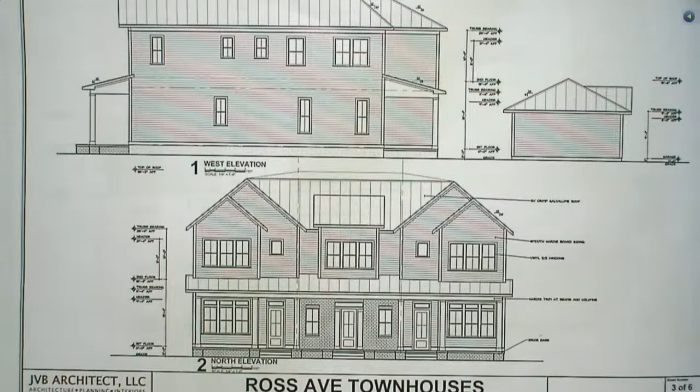And then you also have the mansard at the top, is that right? Yeah, the mansard will be unseen. That is nearly flat, like a half-inch roof pitch. It would be a different material—it'd be a TPO or something. Can you bring that elevation sheet down a little bit so we see the top of the west elevation? Yep, like that. There you go. Thank you.

So there are two houses across the street that do very similar things. Again, this is pretty typical—well, not typical, but there are a lot of older houses in Tampa Heights that have some version of this, where there's a flat part of the house in the middle of it. What is the material for that? That would be a TPO material. You wouldn't be able to use a metal roof—it's too flat, or a modified bit. Yeah, yeah.

TPO or modified bit? Either one works, but ideally we'd want a gray TPO. We'd want the roof material to match the existing one, even though there'd be very little ability to see it, so that if there was any appearance showing, it would be uniform in color.

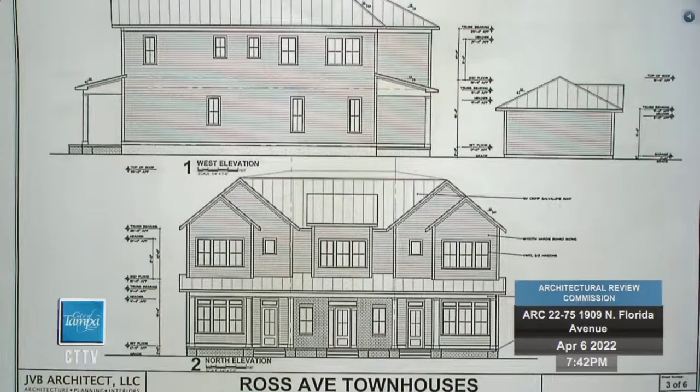One of staff's comments was to incorporate fenestration into the west elevation of the accessory structure. Is that something you would consider? This wall is really behind the YMCA building, but if that's something staff feels strongly about, I guess we could add a window.

Back to the windows, there seems to be a lot of different styles and sizes. Is there a reason for that? Well, I think there's only four.

That was a comment last time, and we tried to streamline them. All the windows up front are the same window. The only difference is this one window here, and on the sides we have egress windows, which have to be of a certain size. These windows are in the living room, so we wanted tall, skinny windows. Then these two are smaller windows in smaller spaces, and these are in bathrooms. So there's a total of four, or five with the front. It's a large structure, and we tried to make the windows appropriate to the placement, size, and scale.

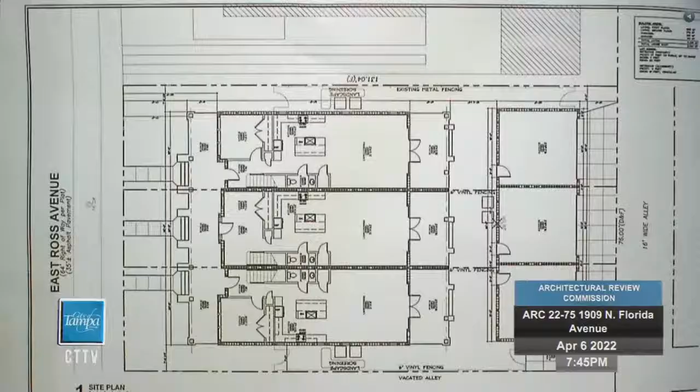What is in that first corner, the bottom left? I haven't used one of these in a long time. That's an office, correct.

Is there a possibility for an additional window along that west elevation? And that would be true on the east side as well. I think if it was further up front versus, well, I guess I changed my mind. Further back would work since it's an office and you're trying to leave a place for a desk. Yeah, but it's a nice corner condition, and windows there make a relationship to the corner, it's nice when you can sit there with a view to the street and also see people coming. No issues, we're fine with that window, it's not a problem.

Okay, great. That's the only question I have about this window. Any other questions?

You have five minutes for rebuttal. I don't think we really have any rebuttal. I think we had some very good conversations with staff, both Elaine and Dennis, and the redesign we made makes for a stronger solution. I'm looking forward to seeing it get built.

Thank you. So we'll go ahead and close the hearing, and commissioners will discuss the case. Any points?

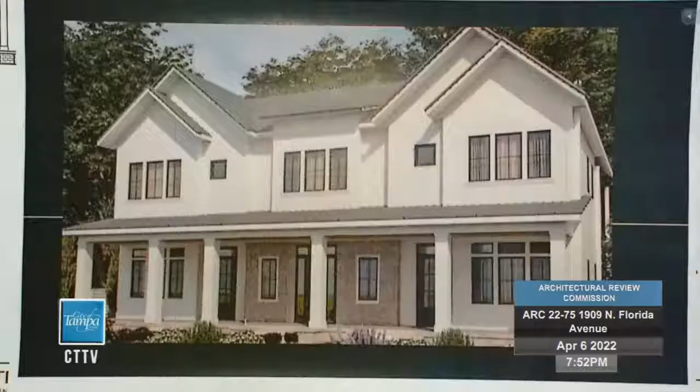Thank you. Form-wise, it's mostly accurate. There's only a couple little roof things that are inaccurate. Okay, thank you.

Yeah, the brick needs to go away. All right, any other thoughts, considerations? You're looking at me. We just want to make sure. Anyone want to? I have no further conditions to suggest.

Move to grant a certificate of appropriateness for the drawings and documents presented at this public hearing in ARC 22-75 for the property located at 1909 North Florida Avenue rear, with the following conditions: that fenestration be added to the west and east elevations of the accessory structure, that windows are added to the east and west walls at the offices, and that the brick at the front facade is reconsidered. Because based upon the finding of fact, the project is consistent with the Tampa Heights design guidelines for the following reasons: that the setbacks, alignment, rhythm, and spacing, trim and details, and the quality of the district is maintained.

And do you understand the conditions set before you? We do, we agree. Thank you. Have a second? I second. All in favor, please say aye and raise your hands. Aye. Opposed? The motion carries 3-1. Congratulations. Thank you.